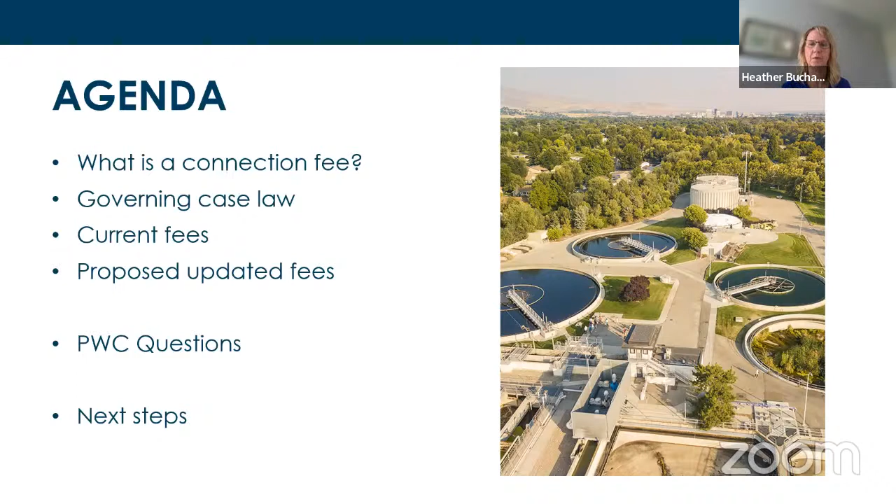So today we're talking about that connection fee side of the house, and we'll provide more detail on that as well. Looks like my screen's okay.

So what is a connection fee? The connection fee is a one-time charge for new customers that are connecting to the system. The fee is paid at the time that they connect. It's proportional to their estimated usage. So we do a calculation of what the usage should be, and based on that estimated usage, we calculate that fee. We often term this as purchased capacity. And if a customer in the future uses more capacity than they purchased originally, they may owe additional fees.

So this could be the case—we do this quite often with our industrial customers. We monitor how much usage they use each month, and if they happen to exceed the purchased capacity for flow, for example, they may owe additional flow capacity. So we can assign that for an industrial customer based on the flow or the different constituents, or the same for a restaurant or another commercial business.

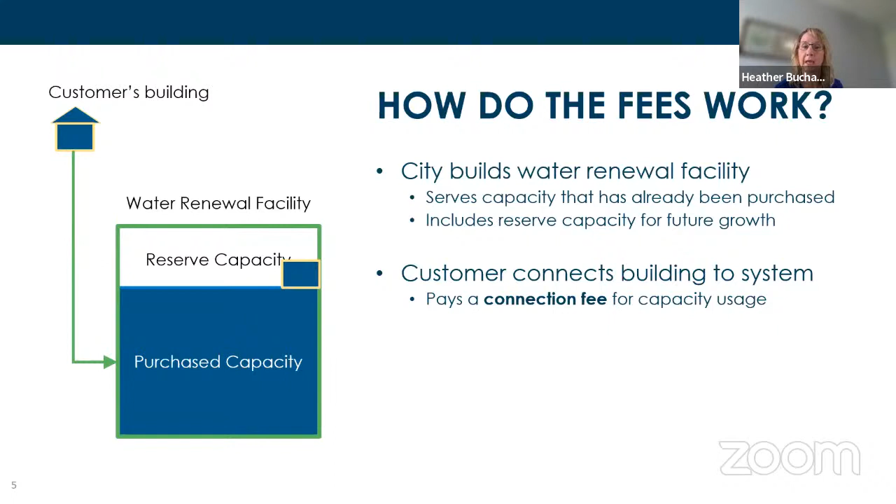So how does the fee work? When the city builds a water renewal facility, they'll build it large enough to serve both the current level of purchase capacity and an amount of reserve capacity. We always consider having enough capacity to serve future customers. So when a customer builds their building, they connect to our facility and buy a portion of that reserve capacity, based on their estimated usage.

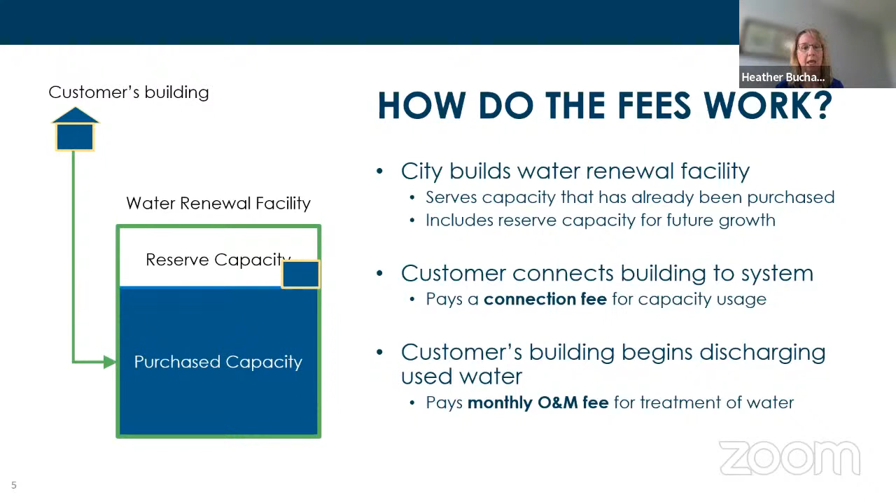At that time, they pay a connection fee. Once they start discharging used water to our facility, they start paying their monthly operations and maintenance fee for treatment of their used water. So within the connection fee, there's a fee for the line that connects their building, and also a fee for the treatment facility.

When we talk about governing case law, we utilize what is called the buy-in methodology, which means we use a fee that considers reimbursement of the city's past investment, or our existing customers' investment into the system that was made to serve growth. So we're recovering that portion for the reserve capacity I noted in the prior slide.

There are a couple of Idaho Supreme Court decisions that limit our abilities on how we charge this fee. The first was in 1991, referred to as the Loomis versus Hailey case, as in the city of Hailey. This established in court case law the buy-in methodology.

More recently, there was a case in 2015, North Idaho Building Contractors Association versus the city of Hayden. The Building Contractors Association at this time was concerned that the fee the city of Hayden was charging was being implemented more as a tax rather than a fee for connection.

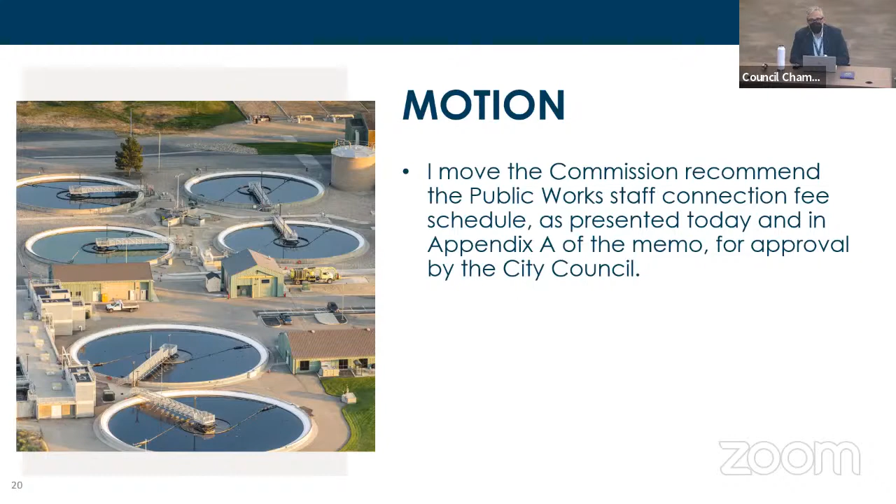Okay, thank you. All right, and that brings us to the next item on our agenda, an update on water renewal bond issuances. I will turn it over to staff. Chair, thank you, and this second item is also going to be covered by Heather. It's just a quick update for the commission on where we are on the bond issuances related to water renewal.

Great, thank you. So Chair, Commission members, I briefed you a few months ago on where we were on our fiscal 22 bond issuance. You already know we held the bond election in November, which passed with over 80% approval. This allows us to issue up to $570 million of bonds over the next 10 years. So we're planning on doing our market issuance bonds in two tranches, one in fiscal 22, and we're anticipating the second in fiscal year 2024.

We're also working on our WIFIA loan application, which should be submitted in the next month and a half to the EPA. That would be the other portion of our bonds. So for the market issuance bonds, we're anticipating using 171 million of that 570.

And then we're expecting WIFIA to take up 399 million of the 570. So this first bond issuance for water renewal sets up the framework that we will utilize going forward. Since we haven't issued bonds in the water renewal fund in decades, we have to start with that basic framework.

Okay, all right, are we back in action? I think we're back in action.

Thanks for having us, commissioners, chairman, and councilmember Bageant. As I said, we're going to be talking today about

our waste stream here in the city of Boise. We've done a lot of work on analyzing that, and we also recently, in 2021, did a waste analysis report where we dove deep into exactly what the people in the city of Boise are throwing away. So we have a lot of information. You also have an attachment that we gave you in the agenda that dives in a little bit deeper, because there's so much information we couldn't really include it all.

And we're also happy to provide the entire report for those of you who would like to go through that at your leisure. So our objectives today, we want to provide a general overview of our current waste streams.

That's trash, recycling, and composting. After that, we're going to look at the waste stream analysis we did, which looks in detail at what people are actually throwing away in the trash, so we can see what other opportunities we have to divert material. We're going to report on some of our successes and challenges in materials management and also discuss some future diversion initiatives we're looking at.

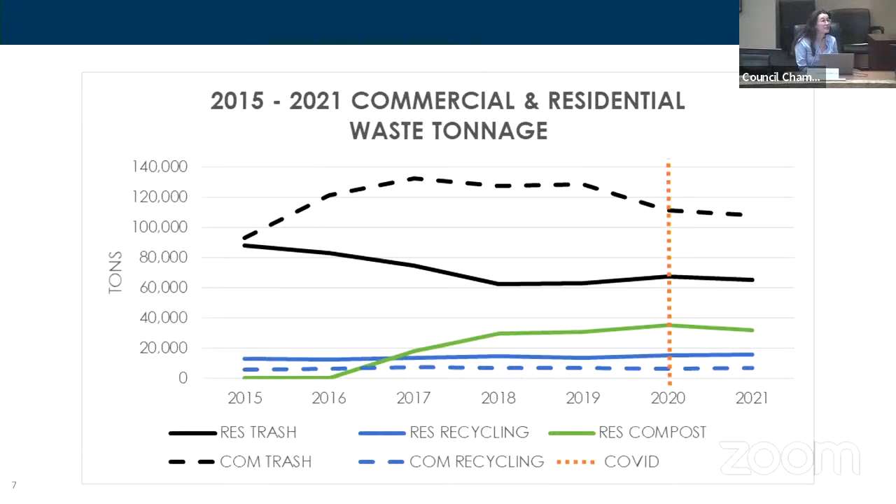Dovetailing off my previous question, I know there's a lot of effort being targeted toward residential programs or residential homes to curb the amount of waste they're inputting into the system, but are there also efforts for commercial usage? Specifically, I can think of apartment units that would be incredibly helpful, but I know that tends to be problematic as well with the amount of people in a similar space.

Commissioner, thank you for that question, and Chair, great question, definitely something we're focused on. We just finished the business and multifamily website addition to curb it, and we have great staff now, Gabe and Catherine and others, that are actually offering businesses and multifamily the ability for us to go out to their business and work with them to help find ways they can reduce their waste. Some of this data we're going to talk about goes into specific businesses and what waste they created, and when you see it, you'll be shocked about how much of certain specific types of waste they create. So we found that to be a great opportunity to go out there and talk to them and say, okay, how can we help you either reduce the amount of waste you're creating, find a way to divert it, or start different programs that might address it.

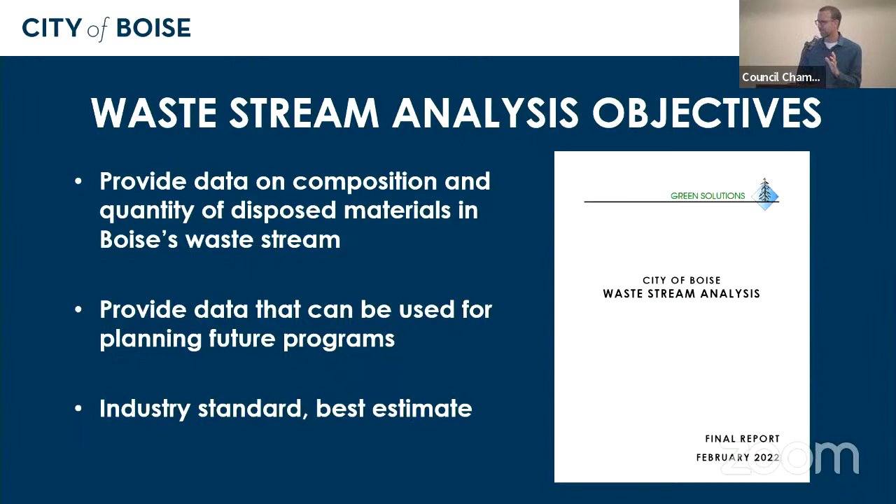Just to talk quickly about the limitations: obviously there's a lot of trash being created, and we took as many samples as we could seasonally, quarterly, over the whole year, but it's still an estimate. So if you see a difference of a percentage or two between something, don't take that as being a lot—it could be within the margin of error.

So the methodology for the waste stream analysis, as I mentioned, it was conducted by Green Solutions, a company that does this exclusively out of Washington State. City of Boise and Republic Services shared costs for the analysis, and it examined residential and commercial waste that goes through the Boise transfer station.

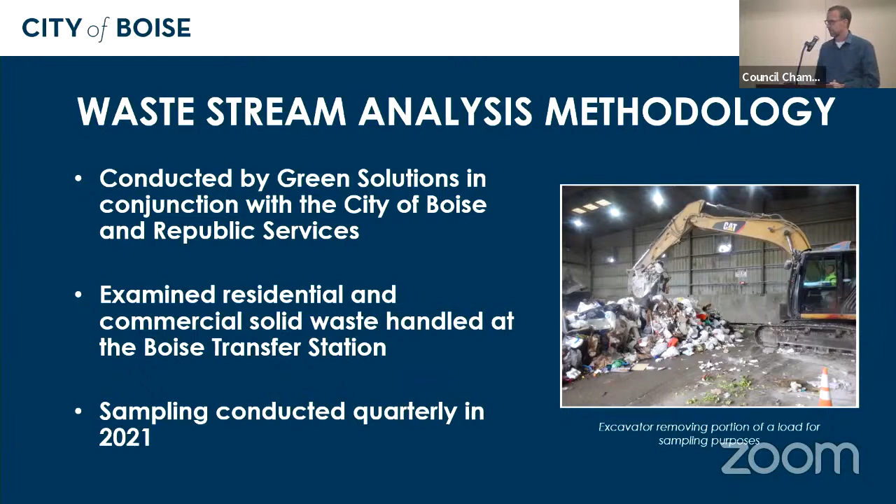The transfer station is where about 75% of our waste goes. Republic Services takes their trucks there, transfers it onto a larger truck that then goes to the landfill. It was conducted quarterly, as I mentioned, in 2021.

Mixed commercial is mainly just businesses that have dumpsters, maybe downtown, maybe outside of town. Commercial compactors are larger businesses that buy their own compactors and are serviced separately, so you only have one truck per compactor. And then construction and demolition waste has temporary containers for construction and also for demolition.

About 20 samples were done from each category, and they break those categories down into 8 broad waste categories and 70 subcategories.

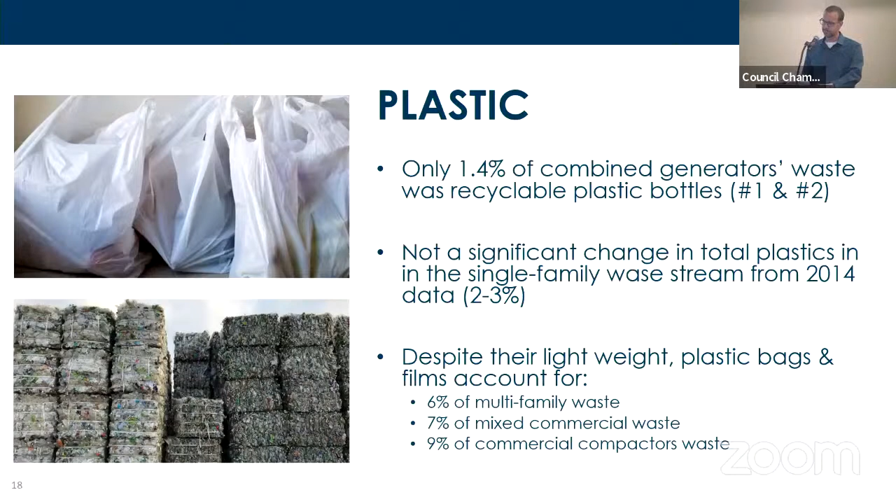One of the other things this shows us is that, unlike residential trash, which is basically the same whether you're at my house or one of your houses, businesses are all different. It's harder to handle, we can't do a one-size-fits-all program for all businesses when they have such different waste streams. That's why we're going to work with them individually. I think there's great opportunity there, but it'll take more time because we can't just treat them all the same.

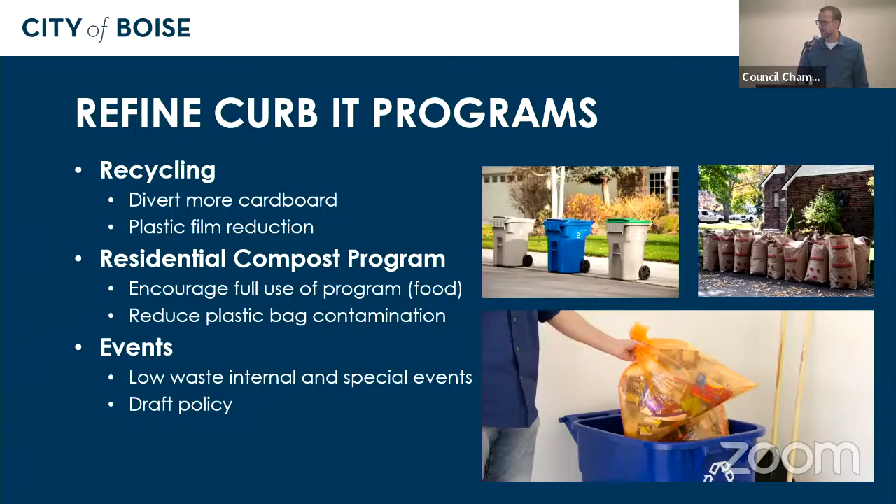We'll refine our current programs as we talked about. We want to divert more cardboard, reduce plastic film, encourage full use of the composting program, make sure people are using that for food waste, and reduce plastic bag contamination. Definitely working with special events and internal city events. We have draft policies we've made and passed on to climate that they'll probably include in some of their policies, where we make it a requirement for certain events that you can't just be passing out hundreds of plastic cups that can't ever be recycled. We think we can do better than that, so we're working on that policy.

And then the new and emerging opportunities we have: commercial food waste. We talked about how much of the waste stream is food waste, so we want to work on reduction and diversion of that food waste.

We're working on some code changes that will allow commercial organics to be collected by not just our current franchise hauler, but other entities that want to compete in that area. One reason we think that's great is because business waste is so different.

You might have a grocery store that creates one type of waste, but a small restaurant creates different kinds of waste, and we can't do a one size fits all. So we want more opportunities for those businesses. A small business could start up in Boise to collect from smaller entities, while larger corporations handle the big entities. We want to open that up since organics are such a large percentage of our waste.

Construction and demolition waste, I already touched on that. We have the demolition ordinance with PDS, and a construction waste recycling program that we're going to start promoting, working on trying to get that wood and sheetrock out of the waste stream.

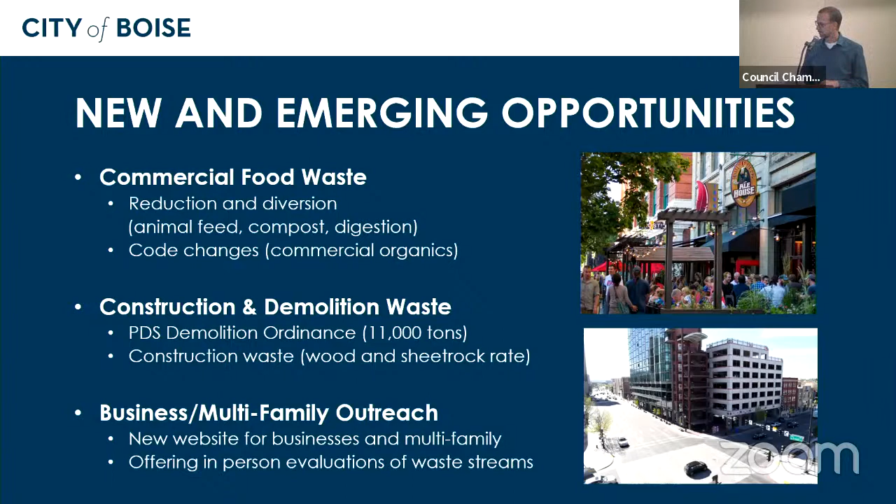Last but not least, this all plays into our strategic planning process, our solid waste strategic planning. As we refine and analyze this data and look at different opportunities, we're going to be working with a consultant to develop a solid waste strategic plan that'll look ahead 10 years at some of the big opportunities we may have to reduce and divert waste.

We want to focus on local solutions such as glass recycling and composting, keeping diverted materials as close to home as possible to create jobs and businesses, and for the environmental benefits. We'll gather public input and look at costs if we start new programs, making sure we're starting programs that divert the most waste possible—the most bang for your buck—because we're sensitive to rate increases and don't want to start a program that doesn't divert much waste but costs a lot of money.

So we're looking at all those things, and we're really excited about it. I will stand for more questions. Thank you. All right, I'll open it up for questions if anybody has any.

Chair Gravatt, I have several. Yes, go ahead, Commissioner Collette. Thank you, that was a really good presentation.

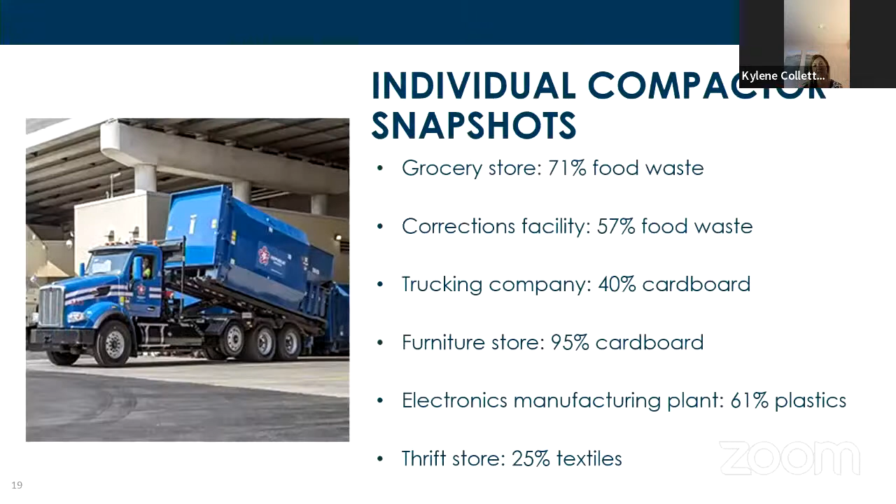A couple comments. I'm in the construction industry. You made a comment about tight spaces and not having room for more dumpsters, but I think it's also a lot to do with cost and how much it costs to have those dumpsters on site. If there was some sort of incentive where contractors recycling and separating materials on site could get free or reduced cost dumpsters, I think that's what would drive change on a construction site, because the guys on site are going to be driven by cost. So if we can reduce that cost for them or give them money back, I think it'll help.

My next idea may not be terribly feasible, but I think about how successful the composting program has been—we've gotten people to separate because there's something in it for them, like free compost. Yes, many do it because it's the right thing, but also because they get something back. So I wonder, especially with the cost of materials right now, if we could find a way to separate out some of that construction waste and have it open and available for the public to just come and pick up for free.

If they could come—and I'm sure there'd be safety or health issues—but they could come and pick up pieces of wood or drywall, whatever little projects they had at home. I don't know if it would be feasible long term or if there'd be enough interest to make it viable, but I could see that being something of interest.

My third comment would be about offices and recycling. I think targeting cleaning companies might help. In our office, for example, we separate everything out, but I've been there after hours and the cleaning crew comes in and just dumps it all in the same bags anyway. So perhaps some outreach or incentive for cleaning companies to make sure they're actually separating and recycling would be more effective than outreach to specific offices. But maybe that's just an isolated experience for me.

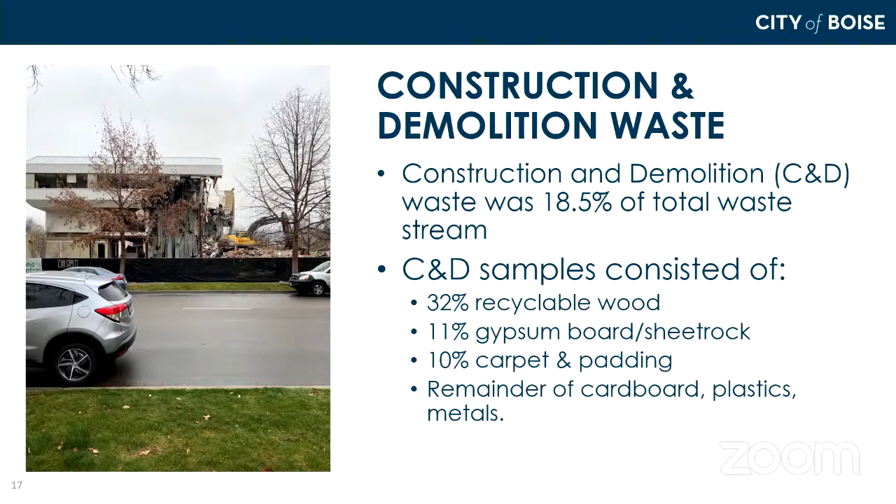Chair, Commissioner, thank you for those three questions. I'll start with the last two because they're new ideas and I really like them both. I don't know how feasible they are, but I really like the idea. We really want to focus on reusing more than recycling, right? So your example with the wood and perhaps even sheetrock, where people could use that material as opposed to us hauling it and then recycling it—it's a better use, a higher use, and it reduces the environmental impact of those materials immediately. So love the idea, we'll look into it, see if any other cities are doing it.

I'm not sure. Your comment about the cleaning crews is a good one too. We have seen where cleaning crews aren't part of the office, so to speak—they're a contractor. So the office does their job, but then we need to make sure the cleaning crews are doing their job. So I love that idea. Perhaps it's something we could build into our business outreach as we talk to some of the larger cleaning companies in town and ask them what we can do to help, and can we educate their staff, what have you. So those are great, both of those ideas.

Back to your first point on incentivizing for the construction and demolition waste—we do. I agree with you, it comes down to money for a lot of businesses. Some of them will do it because it's the right thing to do, but a lot of them need to compete and they can't do that if they're charging a lot more money. Our current rate for that recyclable wood and gypsum board is quite a bit lower—I'm gonna say at least 30% lower than the trash rate. So we do have an incentive there.

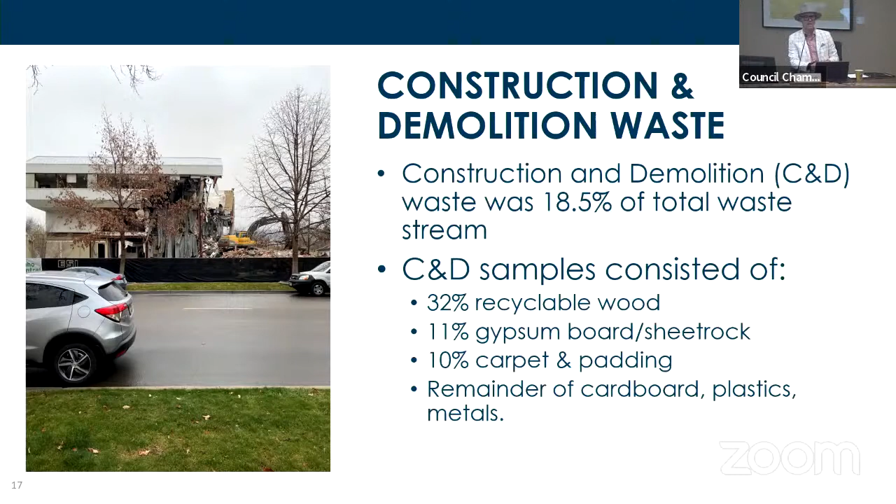I've got a million ideas, and I'd be happy to follow up with them. They're maybe not exactly for recycling programs, but I know there are other programs that recognize local businesses served by various levels of government with a badging system or something like that, to recognize folks who make efforts to achieve a shared goal. So that may be one thing to explore, looking at the timeline of the waste loads over the past couple of years.

Trying to think back to one of the earlier slides, the timing of when particular programs were started or really ramped up, I'd be interested in seeing what program designs and outreach mechanisms may have aided in the leveling, especially of commercial waste, even as our population continued to grow, because that seems asynchronous with what we would expect. So looking at what we've been doing over the past couple of years, maybe to feed into and inform this 3-month-old nascent outreach program.

Thank you, Commissioner and Chair. We have thought about several different ways we could recognize businesses for their efforts. I know different cities and communities have award programs for things like, you've reduced your waste this much. I think a great way to start is to recognize the people who are engaging with us and trying to do something about it. Give them an A for effort, right? If people don't try, it's not going to happen.

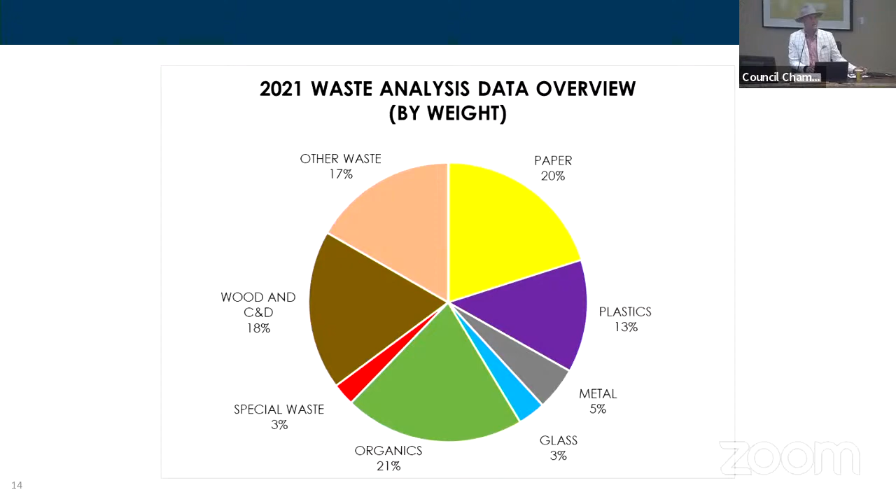And your other comment, if you could reiterate that, did you want more input on why the commercial waste sort of flatlined during certain periods and what programs may have had an effect on that? I wasn't soliciting any particular kind of feedback, I was just thinking out loud about that trend through the filter of some of the programs outlined in the timeline in one of the earlier slides, and how those might be correlated, as a correlation was pointed out in the initiation of the composting program, and some of the reductions potentially of the residential waste.

Sure, yeah, that's definitely something we can look into. I also didn't mention that from now on we'll be doing the first part of this every year, which was the look at all those different waste streams, and then we also plan to do another detailed waste analysis, hoping at least every 5 years. It's not that expensive, about $60,000, and Republic helped us pay for half of it. Our plan is to really keep going with this, and we'll be able to see those trends a little better in time.

Can't wait. Any other questions?

Commissioner Ellis: Thank you. I was thinking about the last time I remember the waste components were published, was it 2016? Because it helped give good reasons for why to do the compost program. Were you able to look at those two? Because I was thinking in the Curb It program they were saying it was 40% organics, and now it's 20. So it's huge. Were you thinking that kind of tracks, or, oh, we were really hoping it'd be 10? I was just curious looking at those two.

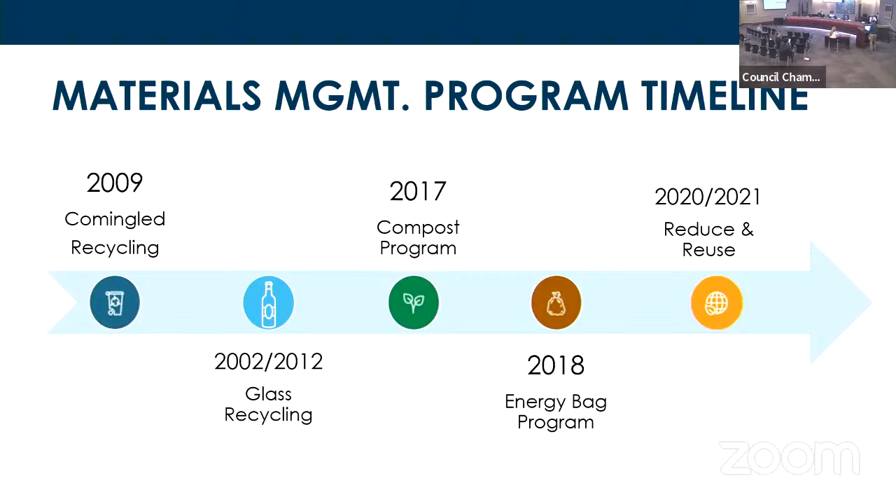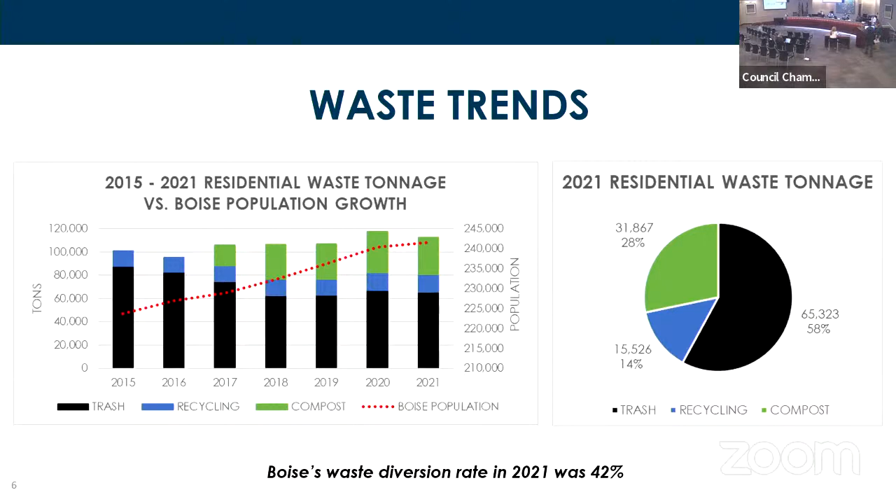That brings us to the final item on our agenda, the Public Works Commission subcommittees. If you reach back into the recesses of your minds, you can remember the past couple of meetings we've had a few small discussions around the potential for diving deeper into a few topics that really need our focused attention and continued learning as we make some pretty big decisions around two particular topics: our climate action, which is pretty broad, as we saw just a few slices of today, and also helping guide some of the decisions around our water renewal utility plan and some of the infrastructure that will be developed with the bond that was just passed. And so we are finally ready to kick off.

With these two subcommittees, what we are going to do is officially start the Water Renewal Subcommittee and Climate Action Subcommittee, with myself and Commissioner Crowley as the representatives on the Water Renewal Subcommittee, and Commissioners Morgan and Ellis as the representatives on the Climate Action Subcommittee.

What this will entail, over about the next year, is a trial run. We're going to dive into the nitty-gritty and get into some more lengthy discussions that we just aren't able to have in our time up here regularly enough and in enough detail to really be effective. We will work with staff to set up meetings and create a platform where we share documents, get regular updates, and produce minutes. I do ask that those minutes are made available to the full commission, either through our agenda packet or otherwise.